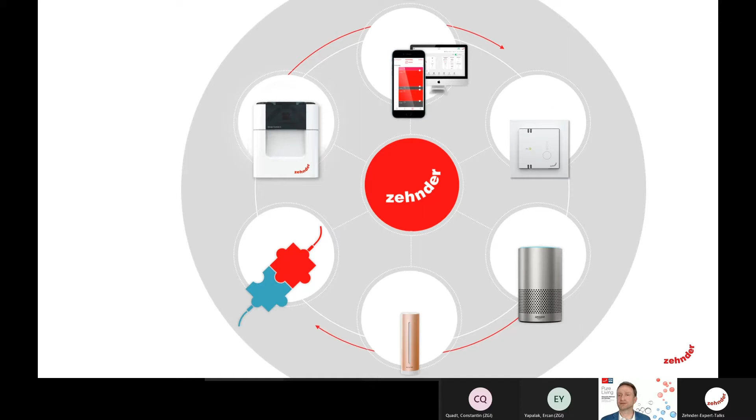So the actual reasons to digitally connect a comfort ventilation unit, a ComfoAir Q in this case, is if you're an installer, you probably want to optimize your services, your digital services. You could proactively inform your customers when the indoor air quality needs attention. And you can achieve a closer connection to your customer by digitalizing the ventilation systems.

If you're an end user, you maybe want voice control for your convenience, or you want a uniform user interface for all technical systems in your house. Not have a telephone with 10 apps to control your house, but everything from one system. But there is more. For example, remote maintenance, ventilation comfort on demand. Of course, the confident feeling that everything works as it should. And of course, smart home integration. On the next slides, I will present the first step of the digital integration for ComfoAir Q.

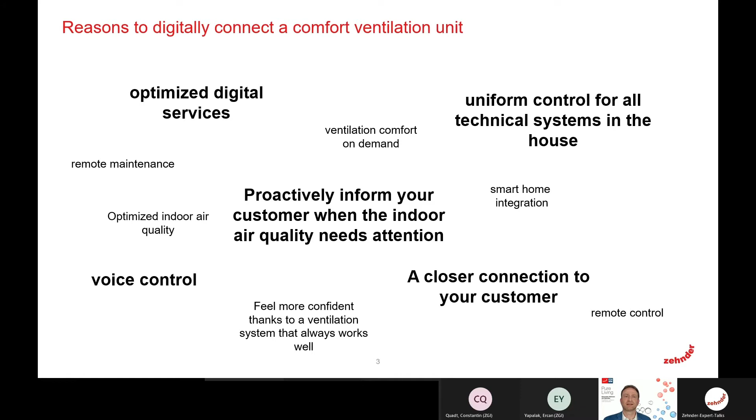So what is actually needed for digital integration? The components that are needed are, of course, a ComfoAir Q. That's obvious, otherwise there's nothing to digitalize. Then the gateway ComfoConnect LAN C is the central part, the gateway to the digitalization. So for all the types of digitalization and connectivity, this is the key part.

Then you need a home network. Everyone has that nowadays. You need a smartphone or tablet, and of course the app on the tablet or smartphone. The app is available free of charge for iOS and for Android. Of course, you also need internet access if you want to have cloud connectivity and remote support.

There are some special cases for connectivity, and that is for a local integration into a smart home or whatever. That is, for example, the KNX gateway. This is a special gateway only for the purpose of connecting to KNX, and we won't speak about it today, but in our next talk tomorrow, we will explain what it is.

There's also another gateway that we have. It's the service case, the ComfoConnect LAN KIT C. This is a gateway that the installer carries around with him to make a local connection to the system of customers. And it's also not related to the digitization that we speak about today.

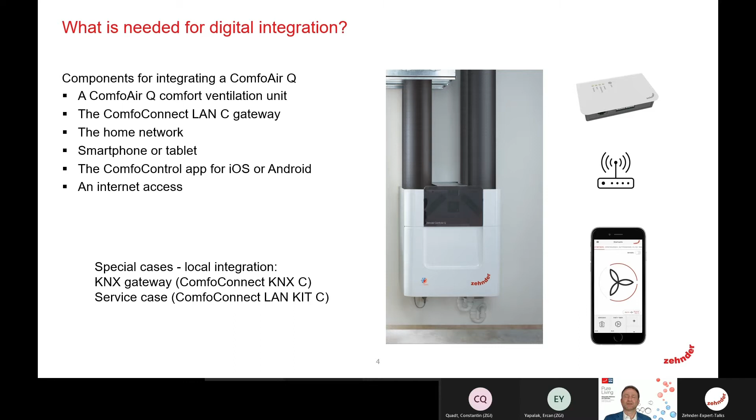So let's see which steps you actually take in order to integrate a ComfoAir Q into the digital world. Prerequisite is, of course, an installed ComfoAir Q. It doesn't have to be commissioned, but it must be powered and connected to the air distribution, and a connected gateway ComfoConnect LAN C. Typically, the installer would do all these installations, but the gateway ComfoConnect LAN C can also be installed by an end user who has a little bit of affinity with technology.

The actual integration then takes place by connecting the gateway to the home network. This is done by the end user, typically with a cable. That's the standard way, and it's of course the most reliable connection. But it's also possible to put Wi-Fi extenders in between to have a wireless connection. The next step is to search in the app for the gateway, and within a few seconds it will find the gateway.

And in the settings for the gateway, you can give the gateway a name in order to make sure, if you have more gateways, that you know to which system you are talking. You can set remote access and so on, just to manage your gateway. There's one important step we always recommend, and that's to secure the gateway by entering a PIN number. If you have such a PIN number in the gateway, not everyone who by coincidence has access to your local network can connect to your system, so it's protected.

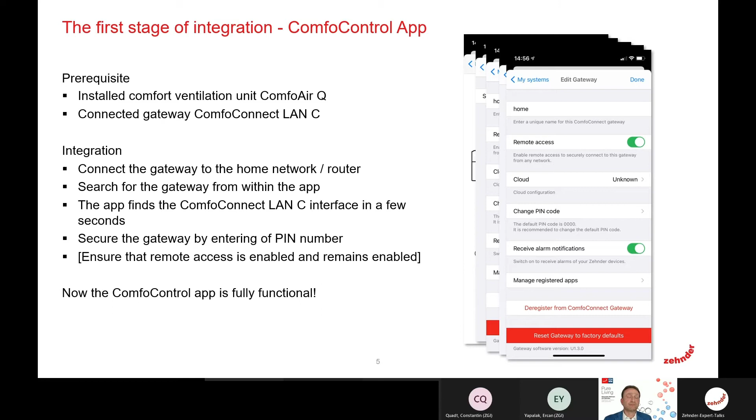It is important to check that the remote access is enabled, because the remote access is the base for the remote service. However, for customers who want to keep their data strictly in their house, it's also possible to disable the remote access, but then of course the advanced functions that we offer are not possible, so it must always be enabled. Now the ComfoControl app is fully functional.

So the question is, of course, what can you do with the ComfoControl app? There are a lot of, sorry, I have to think. The ComfoControl app is very suitable to operate your ventilation system as an end user. It is possible to do the ventilation settings, increase the ventilation speed or decrease it, or to set timers, for example, when you're not at home or when you're cooking, to set a timer for boost ventilation.

Then it's possible to activate other timers, more technical timers, for example, to switch off one fan for a certain time, or to set temperature preferences. This is also for the end user. Then, of course, we support from the app the filter change. We have nice pictures that show where the filter should be placed, left and right. There's a link to the filter shop so that you can conveniently order new filters.

And the app gives full insight into the details of your system. Not only the details of your system, but also important details of your indoor climate. For example, the ComfoAir Q provides 4 temperatures, the indoor temperature, the supply temperature, and also the humidities. So this gives you an impression how your indoor climate is even when you're away.

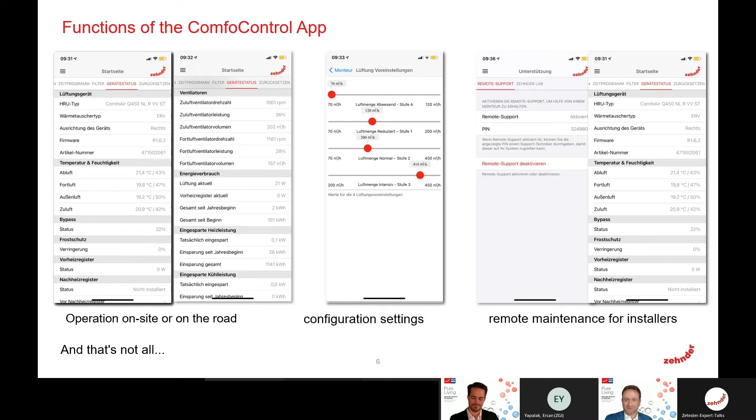For many cases, it will be very interesting for the understanding of your indoor climate, but also for failure analysis, to look back in the past and to see how things develop over time. And how this is possible and what you can do with it, that will be explained now by Constantin. Thank you very much, Peter-Maarten.

I'm happy to present to you today some features of our newly developed indoor climate dashboard. And for that, I'm going to quickly switch over. Currently, I'm logged in our dashboard as an end user. So I'm a customer, and here I have the overview of my installed devices. As Peter-Maarten previously explained to us, I already connected those systems, and

Just a second. Okay. You can see your screen. Yeah, it is fine. Good.

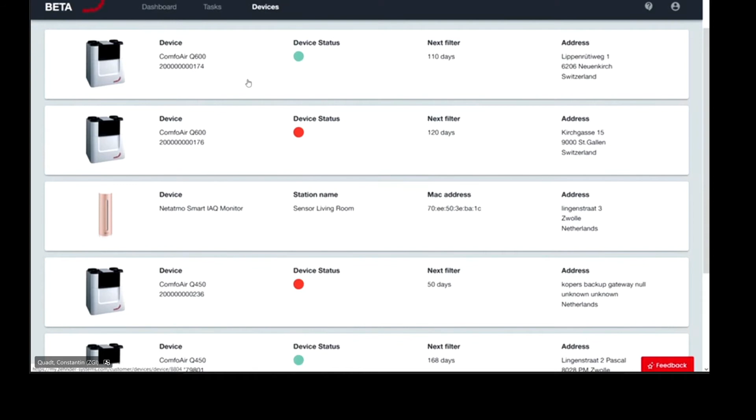And connected them to our cloud and the indoor climate dashboard. I can see multiple units of the ComfoAir Q ventilation system and an external sensor that was integrated as well. And I could connect a Zehnder product, a bathroom towel radiator from Zehnder, as well. And on the right side, we can see the addresses where our devices are located.

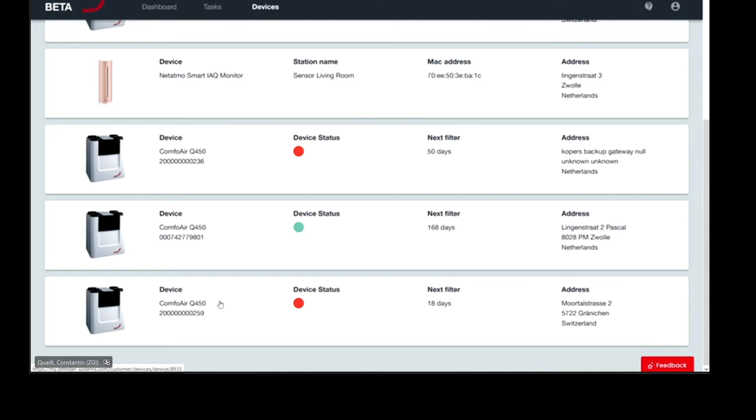I have some metadata, the device status, and when the next filter is due. So I will jump right to this device here and open the detail view for this device. Again, on top, we see some metadata. This is all data that is a little bit more static and is showing things like a serial number to uniquely identify the device, and as previously mentioned, the address.

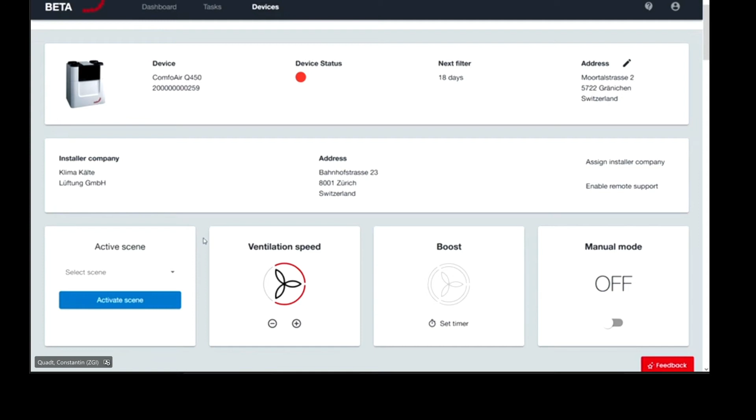Further, we connected an installer company to give us support and offer remote maintenance. After that, we have a section of controls. We already know them from the mobile device. Those are the same functionalities and features that we have on our mobile phones if we installed the ComfoControl app.

And then further down, we get a lot of data previously presented by Peter-Maarten. So we have outdoor air temperature, supply air temperature, and what is very important, on the top right, we see last updated. So this data is from 4/13. That's 1 minute ago. The device transmitted all this data, and what is new, this is being stored.

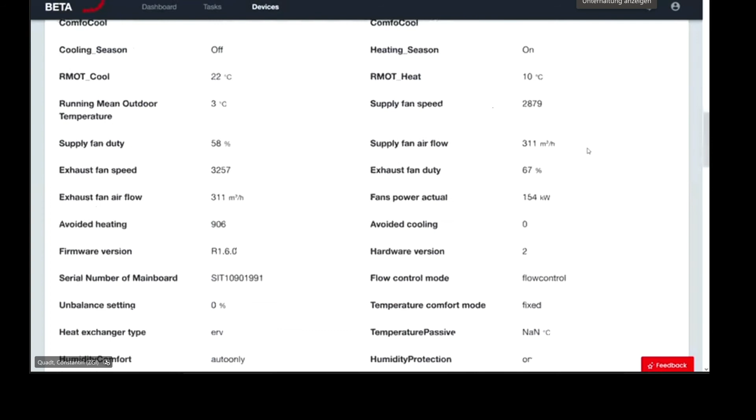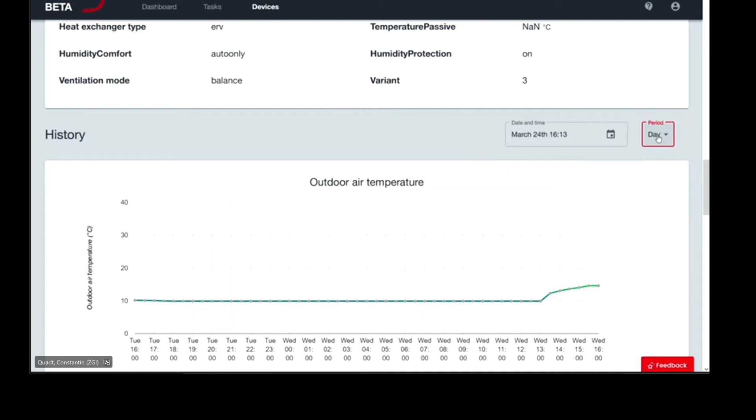And how can we see that? Down here, we have our data history. So I can choose a period on which I want to analyze my data history and can compare outdoor air temperature with supply air temperature. Here we can see we had a lot of constant temperature, and the supply air temperature is quite high. So our heat recovery unit is working just fine.

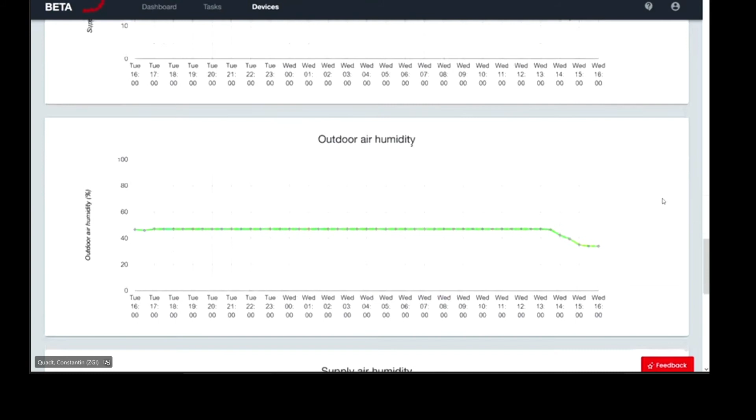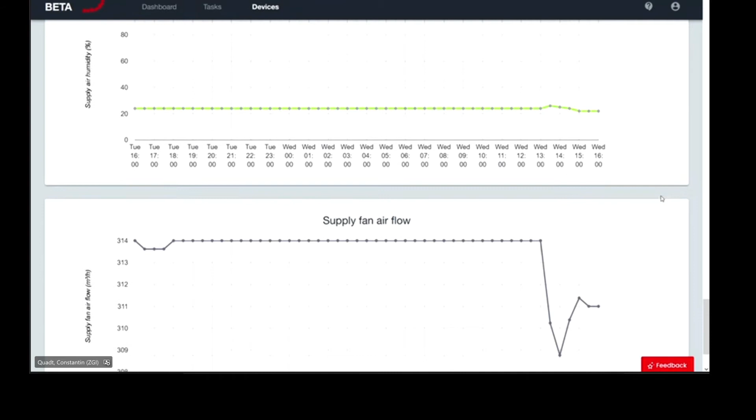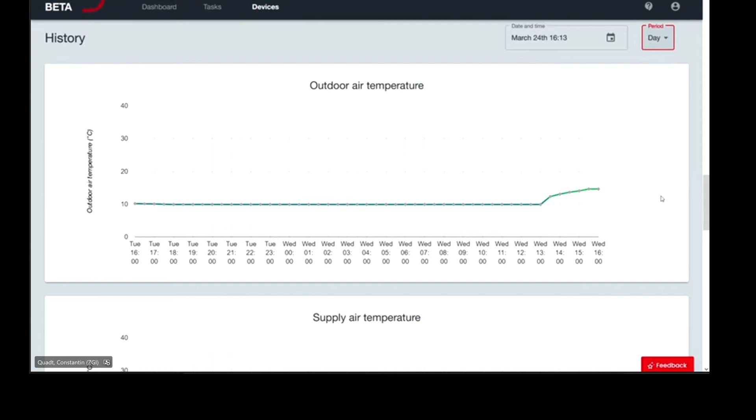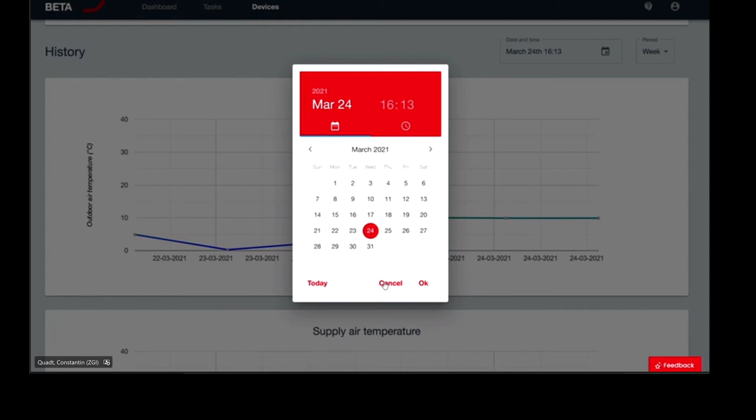The humidity will be there as well. We have supply air humidity and how much the fan is actually supplying in terms of volume per hour. Good. What would an end user do with this information? He can clearly answer questions like, what was the humidity during my last vacation? Then he can check the week and choose this specific week that he was on holidays and check how his ventilation unit was running and providing fresh air to his house, even though he was absent during that time.

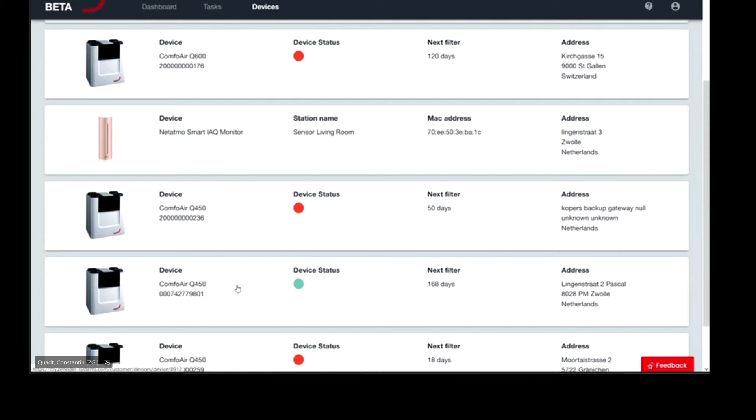Further, I would like to present to you a small problem that we specifically constructed for demonstration purposes, so we can demonstrate how we can actually support a user if he has a very specific problem that could be solved by having a look at his data. So what we did with this device, we detached the tube that is connected to the outside.

So we have a spillover effect with this device: it doesn't really get fresh air from the outside, and the only clue that we would have is that the end user thinks that the unit is not really providing fresh air. But if we check it, all the status is okay, all the sensors are working fine. But if we dig deeper now with the indoor climate dashboard, we can see where the problem might be.

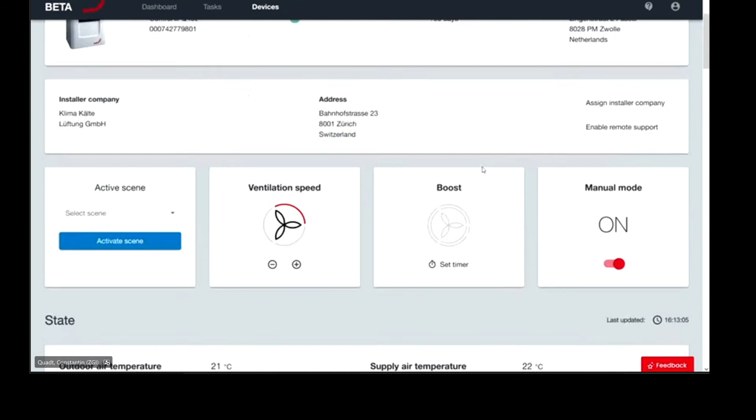So if I compare here the outdoor air temperature, which is 21 degrees, and then the supply air temperature is 22 degrees, sounds reasonable, but the device is installed in Zwolle, and from Zwolle we checked the weather today, it's not quite 21 degrees yet. So this is an indication that there is a malfunction with the tube. So as I mentioned, we detached the tube and it's taking air from inside.

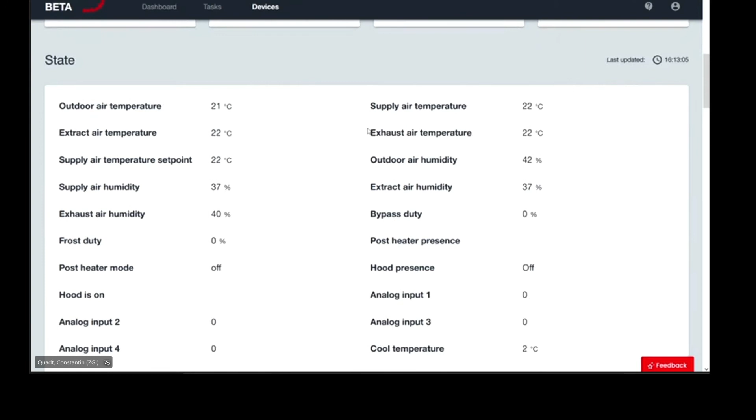And to check how long this problem already occurred, I could go to our history, select the week, and then I already see, well, this problem is already happening since Wednesday at 5 o'clock. Here we have those 21 degrees, and at that time, it surely wasn't yet 21 degrees in the Netherlands.

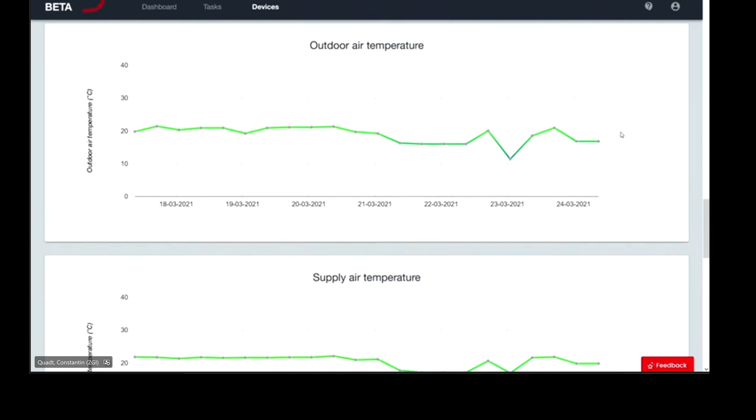The end user could need some support now, and for that, I will quickly switch over to our installer view. I switch accounts, and now I'm logged in as an installer. Here I have again the overview of the devices that customers are connecting to the cloud, and in a second step they connect it with my company as an installer, and I can see the units in my overview for devices. And again, we recognize it's the same overview.

But if we open a specific device and we aim for the same serial number that we just opened previously, we're going to recognize that we don't see all the data. And this is on purpose because data privacy laws require that the data is always owned and controlled by our end user. But what we provide here is the device status and the next filter due date and the address of the installed unit that was shared from the customer with this company.

But now the customer calls us and he explains his problem, and on the phone we kindly ask him that he would give us his remote support. And as an end user, I quickly switch back.

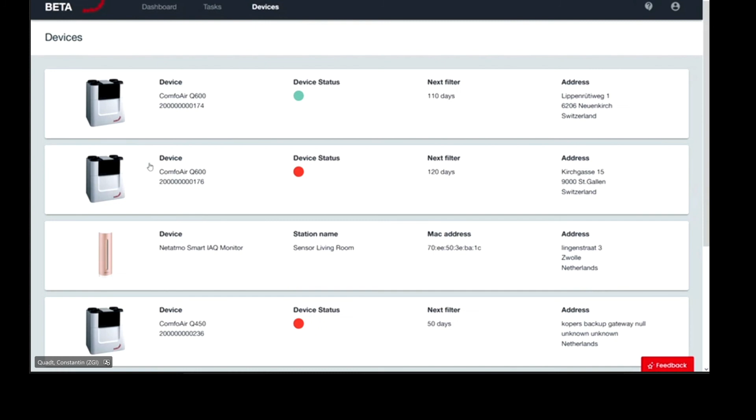This is demonstration issues. Okay. Normally, we would have control over the device. We can try quickly another one. Let's go for this one. Okay, we get the indication that support is active.

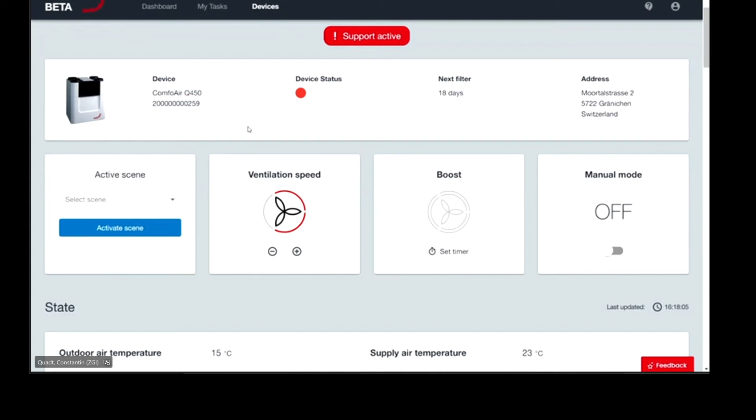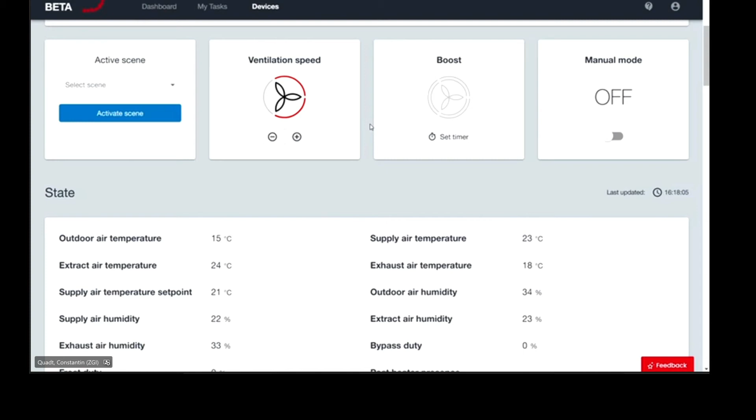And here, as an installer, again, I see support is active, and from previously just the metadata, now we see everything that the end user is seeing as well, and I could even control the unit, make some tests, talk to the customer on the phone, and try to solve his problem according to the data and get the advantage of looking into the history of his controls.

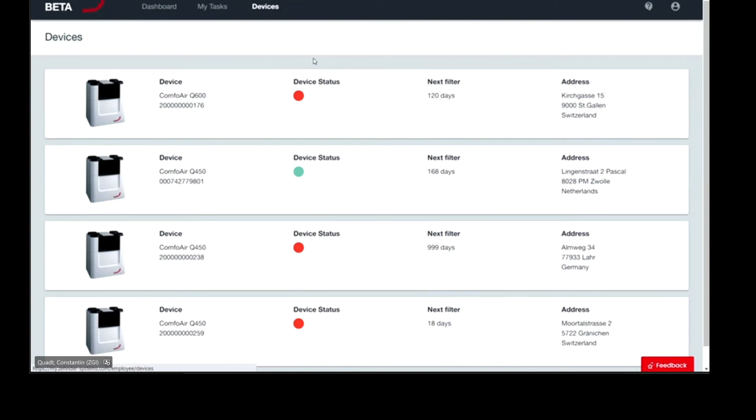Okay, that was from my side for demonstrating the climate dashboard, and then I would like to hand over back to Ercan. Thank you, Constantin. Then I would like to take the opportunity for the next minutes to introduce to you the world of voice control by Zehnder.

So my colleagues have shown you two ways how you can interact today with our end devices. So indoor climate dashboard and also the mobile app are of course also available to your customers, so for the end user. For the end user, we provide with voice control a third way how they can easily and conveniently interact with our devices.

Well, which devices are supported today for voice control? It's ComfoAir Q, the comfort ventilation, and Zenia, the comfort heating unit, that we are supporting for voice control. With Google Assistant and Alexa, we already provide market leaders for voice control providers. So these are the voice control providers that can be used by our customers, and ComfoAir Q and Zenia are the devices that can be used by voice.

Let's jump to the voice control commands that can be executed by the end customer. Here we differentiate between device-specific voice control and scenes. Let's start with the voice controls for the device. For ComfoAir Q, we are providing per voice control 3 functions. First function is to change the ventilation level, activate or deactivate a party mode, or deactivating and activating the presence mode. So if I'm away or at home.

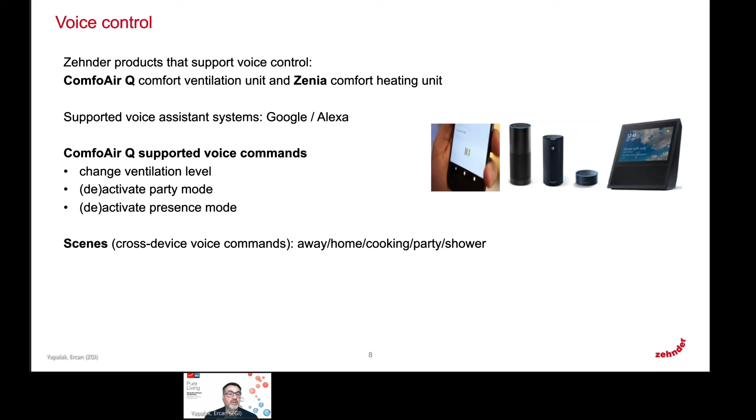The next level of voice commands are scenes. Scenes are cross-device voice commands. Sounds very complicated, but we will have a deeper look on it to better understand what it is. So at the end of the day, scenes are a voice command that can act on several devices in federation. We are supporting as scenes away, home, cooking, party, and shower.

But what exactly is a scene shower command? Let's have a deeper look on this example. When I execute the shower command, I'm sending commands to a ComfoAir Q and a Zenia in parallel that are in federation. So that means on ComfoAir Q, I set the ventilation speed to max, and on a Zenia, I activate the towel warmer. So with one voice command, I can act on 2 devices. That is quite comfortable.

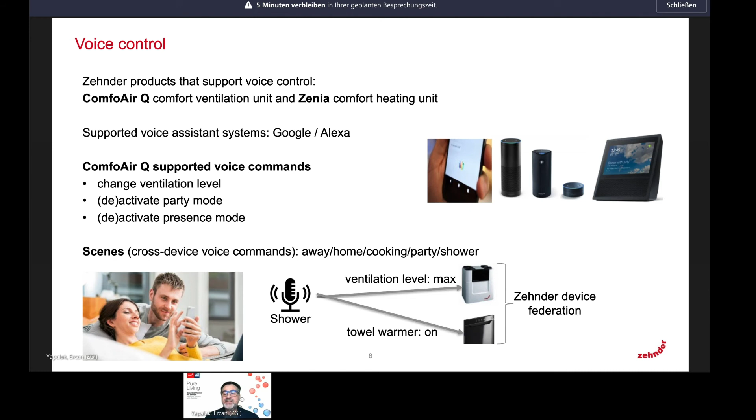Next, we would like to show you a video of voice control in action to get a better understanding how it works practically. Constantin, I would kindly ask you to show us the video. Okay, let me take over and thank you. Switch this one on.

Thank you, Constantin, for this video. I think it demonstrates very nicely how we can interact by voice with our end device, in this special case with our ComfoAir Q. With this, I hope we could give you a comprehensive overview of the world of voice control by Zehnder. And now I would like to hand over again to Constantin. Thank you very much, Ercan.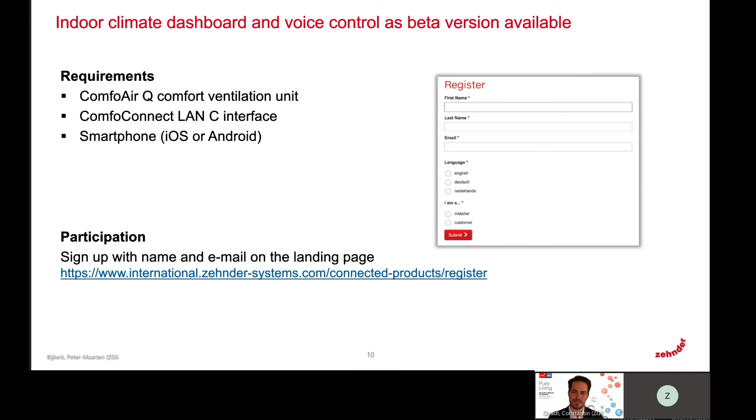With that, I would like to thank you very much and hand back over to Peter-Maarten. Well, I would like to thank you, Constantin, and Ercan to present these exciting new features. It's so interesting, and I'm so happy that this is actually available to anyone interested who bought a ComfoAir Q with a gateway, even if it was 4 or 3 or 5 years ago.